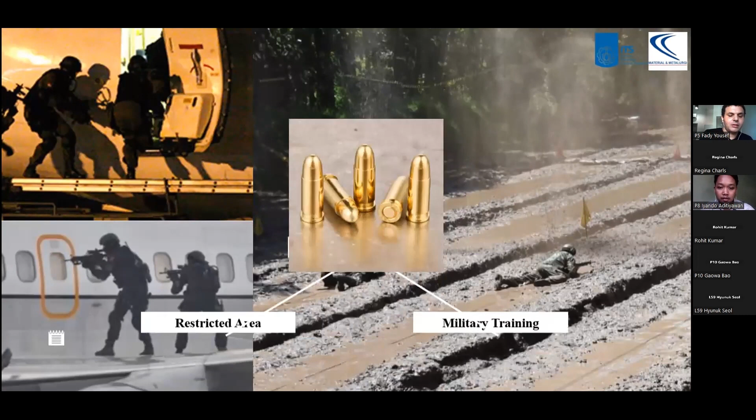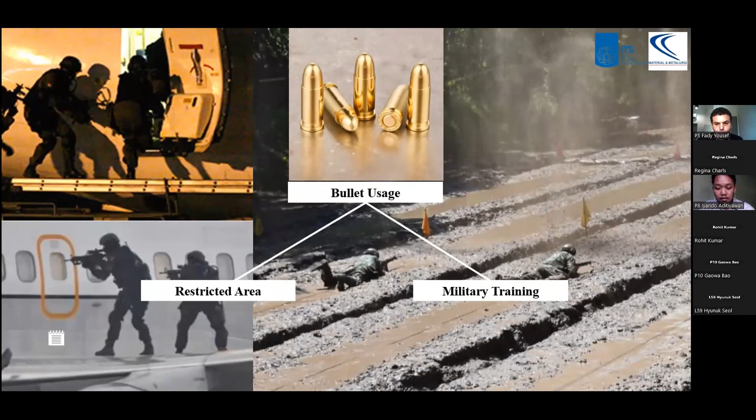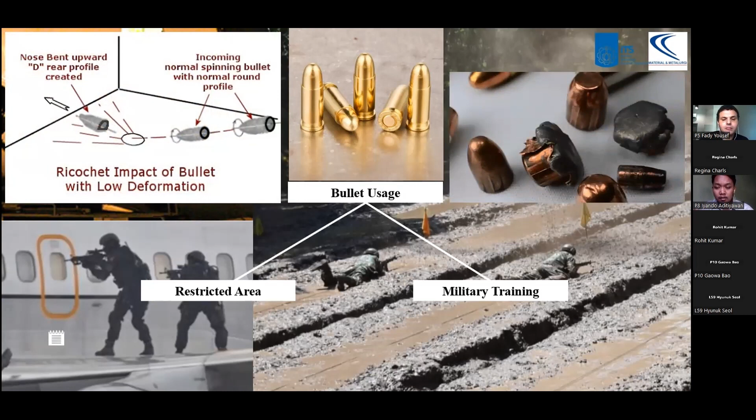Using frangible bullets has become a primary concern, like in military and restricted area usage. The use of this type of bullet is to prevent the ricochet accident phenomenon. The ricochet accident phenomenon is the phenomenon that the bullet bounces back because it hits a hard target and still has energy to move. So the bullet is not deformed totally, but just partially.

This frangible bullet has different properties from the conventional bullet made from lead material. The conventional bullet is made from lead material and covered by a metal such as copper, and they destroy objects fast and easily cause ricochet incidents. The particular property of frangible is that they will experience deformation when pounding or hitting the hard target. Many frangible bullets are developed with copper powder compressed and bound by tin powder from the sintering process.

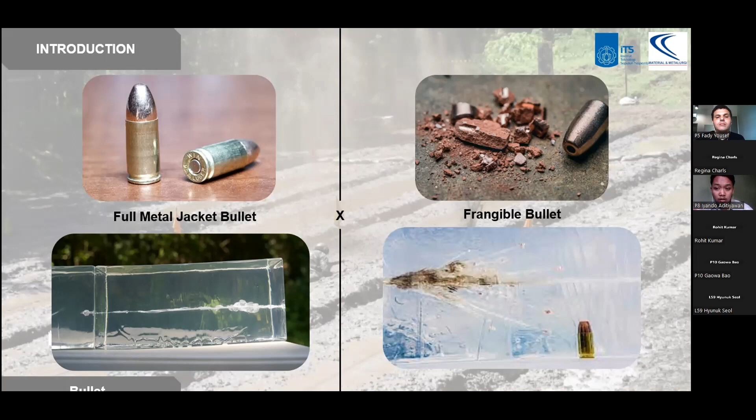The research from Belanger et al.: frangible projectile is made by mixing the copper powder with thermoplastic resin from polyamide group 11 and 12 through an injection molding process. The ideal powder percentage produced from this process is 92.5% to 93.5% and has percentage elongation above 1.7%.

And then the research from Banovic et al., the material of composite, sorry, the ratio of composite for frangible bullet is 9:1 by weight ratio, and it has been found that the porosity of the frangible material can affect the performance of the frangible bullet. In this research, the alternative material is used to replace the copper material that is commonly used in the frangible bullet.

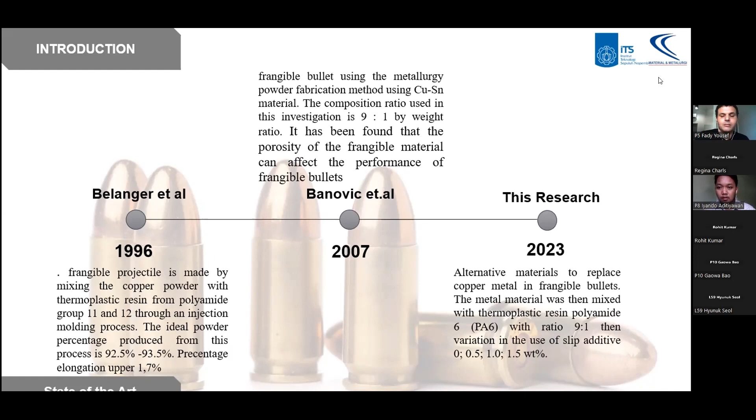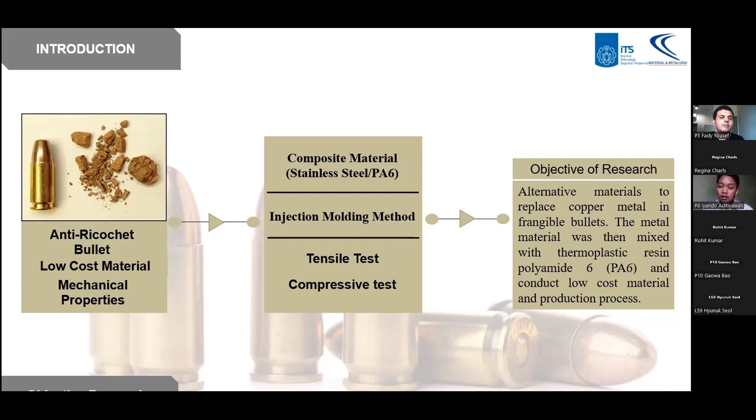And the objective of this research is to find the anti-ricochet bullet with low cost material processing and mechanical similarity to the copper material. So we use composite material from stainless steel metal with polyamide 6, and the fabrication method is injection molding process, and we do mechanical tests like tensile test and compressive test. And then the objective of the research is to get the alternative material to replace copper metal in frangible bullet.

To have a good composite material, there are several steps to fabricate the composite. The first step is compounding process. These two materials are mixed with ratio 9:1 by weight ratio. Then the slip additive, in this study stearamide, was added in small amounts from 0 to 1.5 weight percent. The mixing used a double cone mixer with rotation speed of 25 rpm for 2 hours.

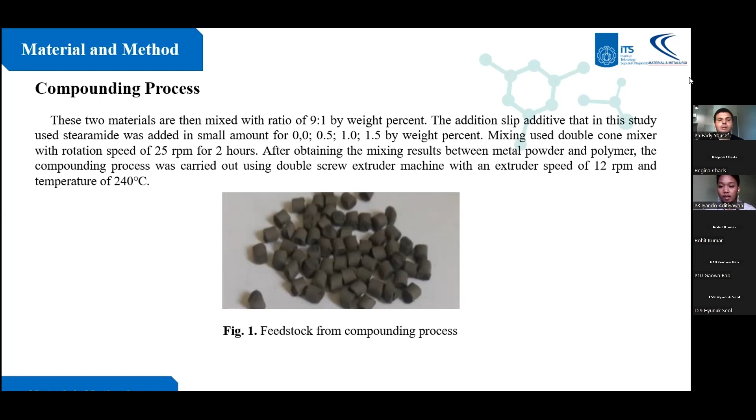The second step is injection molding process. The injection process is carried by putting the composite feedstock mixed in the previous process. The mold used in this injection process is in the form of tensile and compressive test specimens. In the fabrication process, injection parameters are used to obtain good density value and reduce porosity formation in the composite material. The injection parameters used in the frangible bullet fabrication process are followed in table 1. So this is the injection molding parameter to make the frangible material.

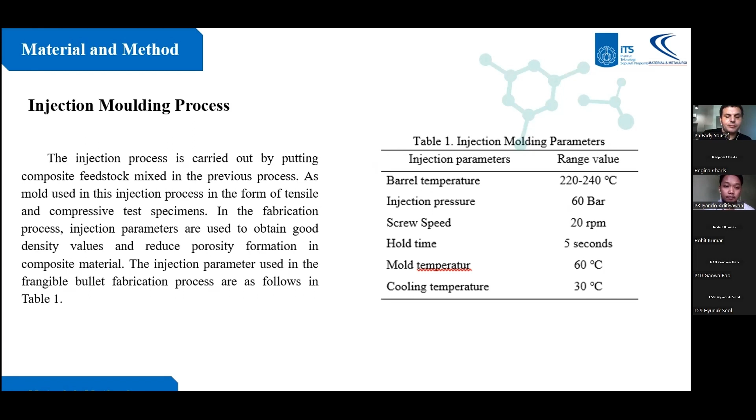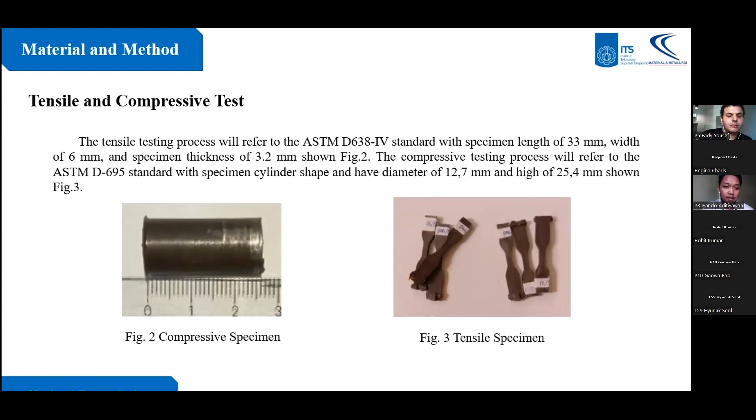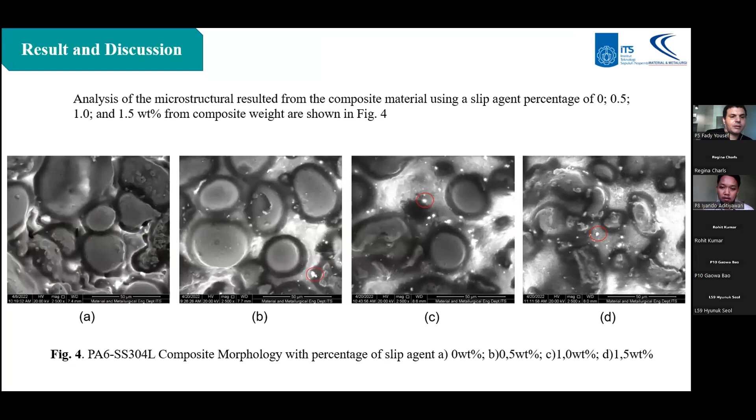Then for the tensile and compressive test specimens, we use standard ASTM D638 type 4 for the tensile and D695 standard for the compressive material. And then the microstructural analysis was done for the composite. You can see the white spot in the red mark, that is the slip additive spread in the composite homogeneously.

Then the elongation percentage ratio. This percentage elongation value needs to be known. It is able to analyze the toughness of frangible bullet when the bullet is released from the casing and passed through the gun chamber. According to the research conducted by Belager, the percentage value of the resulting elongation has a value more than 1.7%. If the percentage of elongation before breaking is too low, the projectile will break up when deformed by the rifling of the weapon.

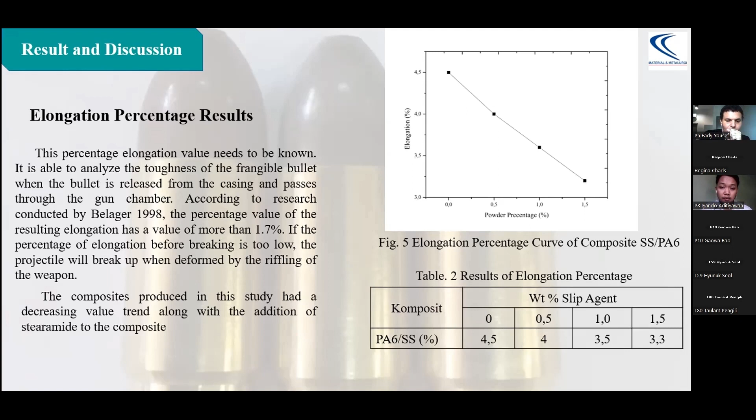The composite produced in this study had a decreasing value trend along with the addition of stearamide to the composite. You can see in the curve of the composite elongation percentage, there is a decreased value of the elongation percentage.

And then compressive strength ratios: according to the research conducted by Rydlo, the compressive strength value of frangible bullets ranges from 31 to 310 MPa. When a bullet is fired and before it hits the target, a frangible bullet must not experience deformation. The deformation happens when the bullet hits a hard target.

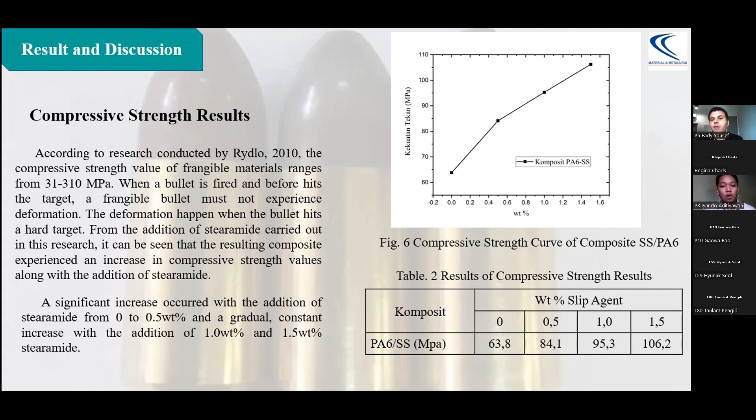From the addition of stearamide carried out in this research, it can be seen that the resulting composite experiences an increase in compressive strength value along with the addition of stearamide. A significant increase occurred with the addition of stearamide from 0 to 0.5 weight percent and a gradual constant increase with the addition of 1 to 1.5 weight percent stearamide.

And the conclusion of the research: in the investigation of metal substitute for frangible material from copper metal to stainless steel, it can be effective as a candidate alternative material for frangible. From mechanical testing, it can be concluded that the addition of slip additive can effectively raise the compressive strength of the composite material, making the composite more brittle by creating a layer on the polymer surface to reduce mechanical bonding and friction between particle surfaces.

The addition of slip additive makes the percentage elongation value decrease, making the composite material have low toughness value. The addition of 0.5 weight percent slip additive is more effective for the characterization of frangible material.